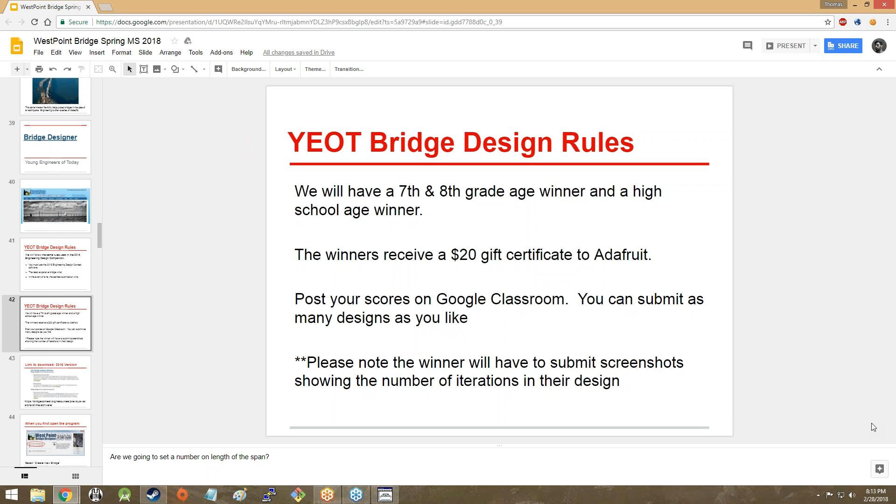So yeah, the winners will receive a $20 gift certificate to Adafruit. Post your scores on Google Classroom. You can submit as many designs as you'd like. Please note that the winner will have to submit screenshots showing the number of iterations in their design. It's basically how you arrived at the bridge that you won with eventually. In the event of a tie, the earliest submission wins.

Alrighty. I've got a couple people who need to download it, so I'll give everybody a couple of minutes to download and install and stuff like that. So at 8:17, we will pick things back up and go from there.

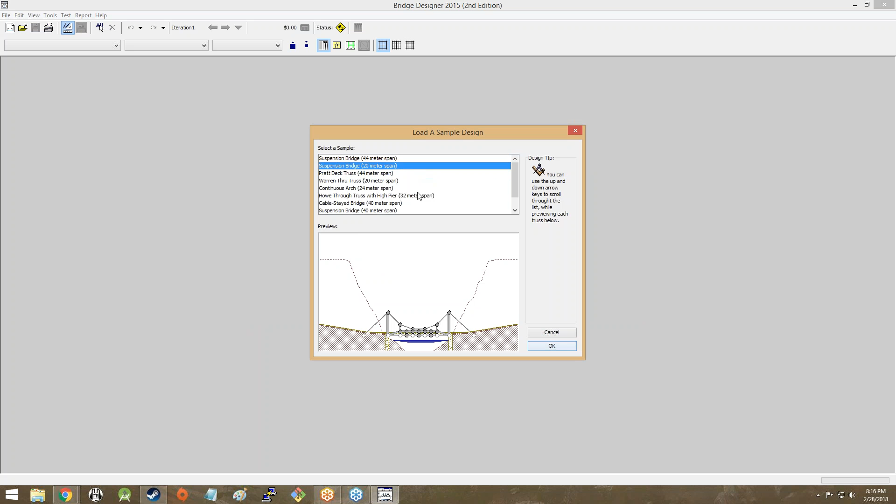Okie dokie. So let's go ahead and get started. So once you've gotten it open, you'll be greeted with this wonderful window. You can either create a new bridge design, which will create a bridge from more or less scratch, kind of, sort of. You can load a sample bridge design, which will allow you to look at some other bridge designs that exist, so that you can get ideas. And you can also open an existing bridge design if you're already working on something.

Since we're going to be working anew, you're going to be setting up a new bridge, and there's a wizard that starts everything off.

Not a literal wizard. I always got really excited about this stuff when I was younger, and there was an install wizard, and I thought it was the coolest thing in the world, and then I realized what an install wizard actually was, and I was a sad child, but that's okay. So yes, not a literal wizard.

So it's basically just a number of steps to walk through in order to get this bridge started. One of them is reading the design requirements, which seems silly as a first step, but it's actually a good idea, because you always want to make sure you know what exactly you're designing for. So this bridge has to be able to carry its own weight, to include the weight of the reinforced concrete deck, plus the weight of a standard truck loading, and to keep the project as low cost as possible.

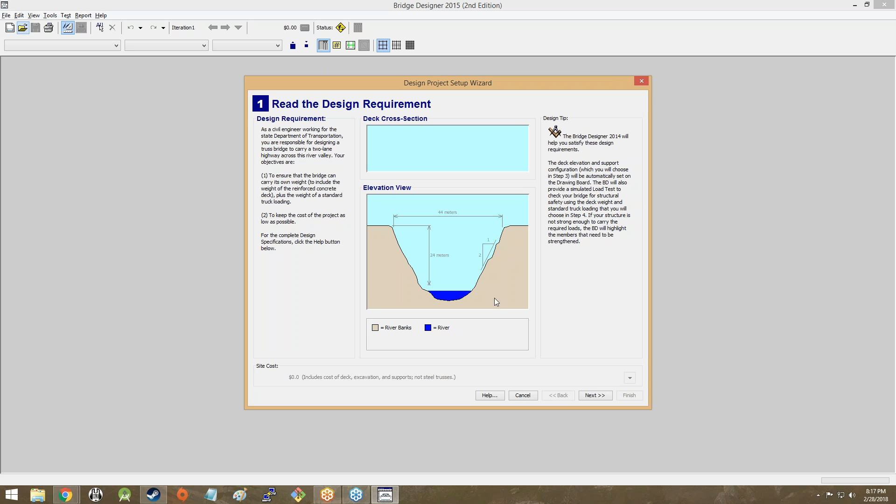If you click the Help button, you can get more complete design specifications, but we're going to click Next. Oh dear. Or we're not going to click Next.

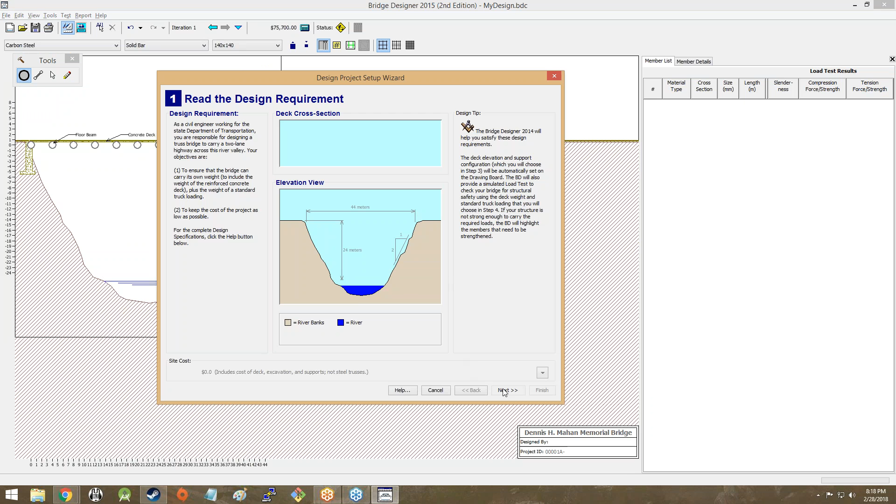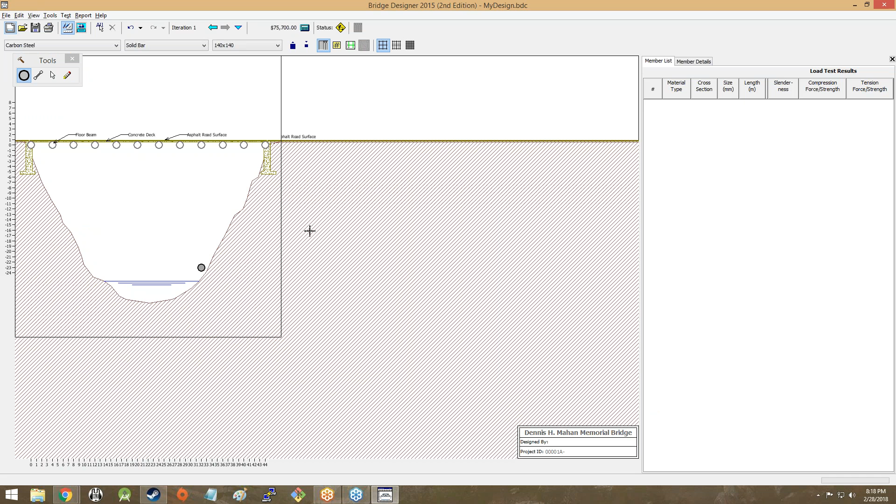Okay, I don't know what I just made. All right, I just made that. No. So my computer has this really irritating issue where the screen doesn't update for this. So it's a lot harder for me to show you guys what's going on when I can't see what's going on. As you can see, once I made the window smaller and then reopened it again, all of those nodes that I clicked to create now show up. So that's not ideal.

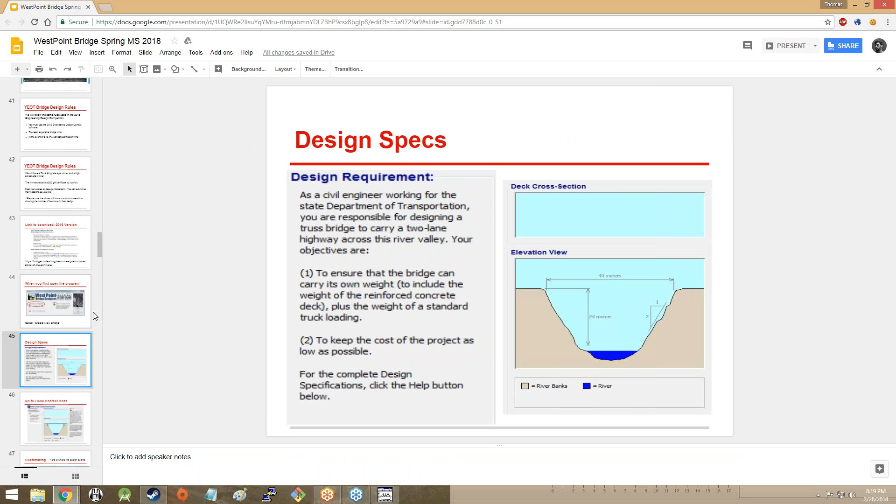Maybe I'll just have to go through on the slideshow. Unfortunately, it's always a little bit nicer when you can do it more interactively than that, but that's okay. So you read the design requirement.

If you're entering a local contest, you enter the local contest information. You guys are not entering a local contest. Anything that you create is going to be submitted to that Google Classroom, so there's no local contest code or anything like that to work with.

Then you want to select the deck elevation and the support configuration. The deck elevation — as you lower the deck, let's go to a picture here. So as you lower the deck, what you're actually doing is lowering the bridge as well, and that makes the span smaller because the bridge doesn't have to cross as far.

Because as you all well know, since you're good at looking at things with your eyeballs, this up here is a further distance than this down here, which is a further distance than this down here, and so on. So by lowering the bridge, you actually make it a shorter bridge.

However, that does increase the cost of the bridge pretty significantly, because they actually have to excavate the riverbanks away in order to lower the bridge down to that height so you can have a shorter bridge. So it's a trade-off: do you go with the lower bridge that's more expensive because you can eventually make it cheaper by using fewer materials?

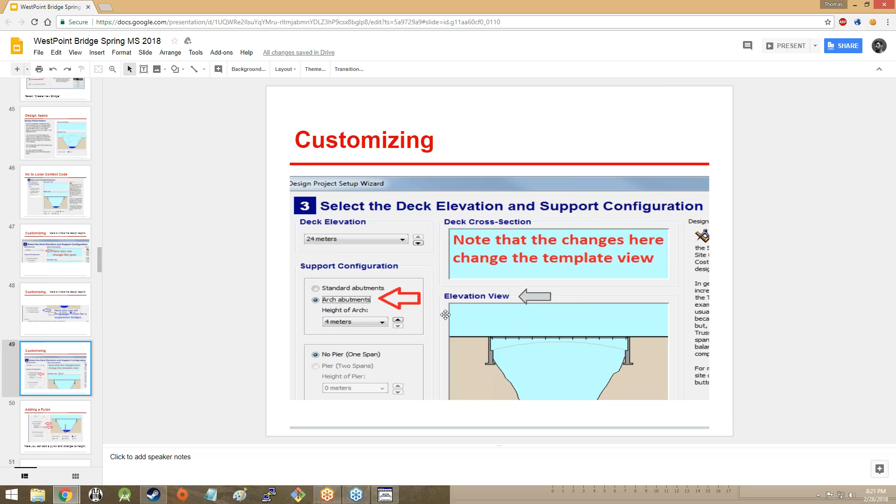Then you can add a pier if you'd like, which is going to be this pillar in the middle. And the pillar will allow you to generate additional support for the bridge because you can bring the pier up and then build trusses underneath it.

Then you've got cable anchorages. And if you wanted to anchor cables and make like a suspension bridge, you could add some cable anchorages.

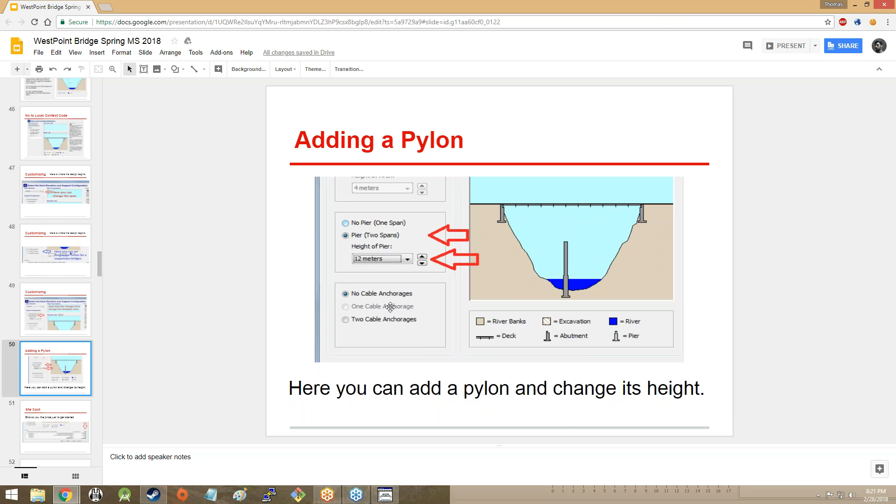Then you'll notice that all of those things change the cost of the bridge. And this is an initial cost for the bridge — all of those things are going to change the cost of the bridge.

You can click the little arrow in order to get a cost breakdown so you can see how much everything costs, so maybe it's a better decision to make the span longer because it costs so much to excavate, or maybe it's a better idea — like you've saved some money here, so you can try to include a cable anchorage so you can have a little bit of extra stability and hopefully make it cheaper, stuff like that.

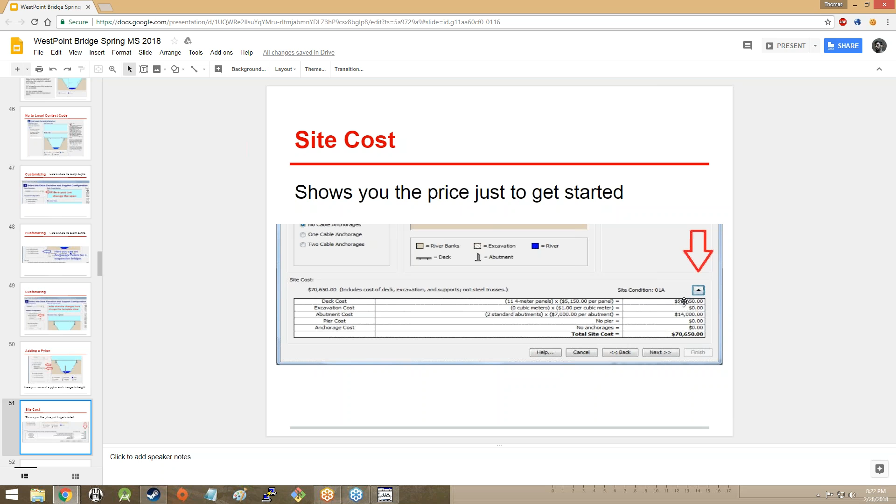Once that's done, you can click next, and then next is going to be the deck. You can either use regular medium strength concrete or reinforced high strength concrete. Reinforced high strength concrete is more expensive, but it's also thinner, harder and stronger, so you might be able to save yourself a little money because your entire bridge will be a little bit lighter. Ultimately it's a judgment call.

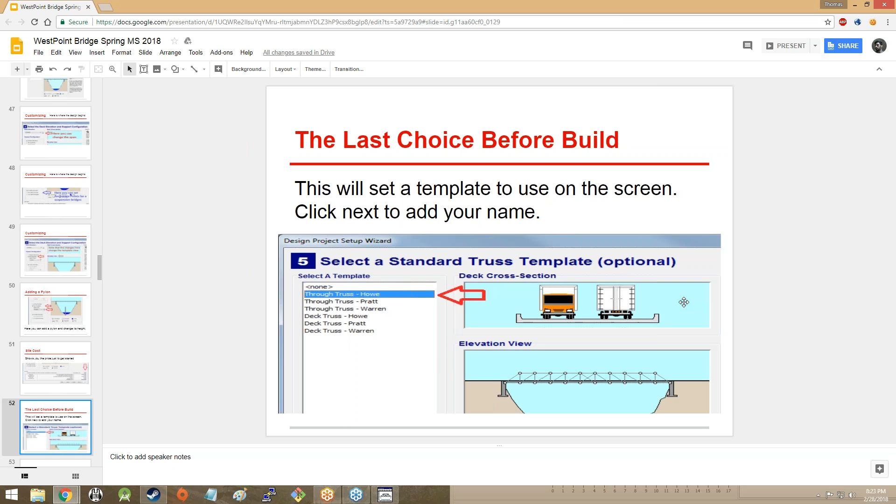Then you'll select a starting truss template, which will allow you to basically create a little template that you can work with in order to get started on making a bridge. Then you give it a name, you hit finish, and you're off to the races.

You get a few different tools on the screen, which are pretty useful. Let's see here.

So you've got a little window here that I'm sort of dragging around and making flip out. This is your tools window. You can draw new nodes, joints, bars or members. You can select items with the cursor, and you can erase them with the pencil eraser.

So I can go through here, and I won't be able to erase these because the screen is updated since then. That's not actually where the nodes are anymore, but that's okay.

Nodes can be drawn on the gray squares provided in the truss template. Now you might notice that along the bottom of the truss template, where the ground of the bridge is going to be, you won't be able to draw anything there, and that's okay. That's because they've already started for you, so you have a starting point for your bridge.

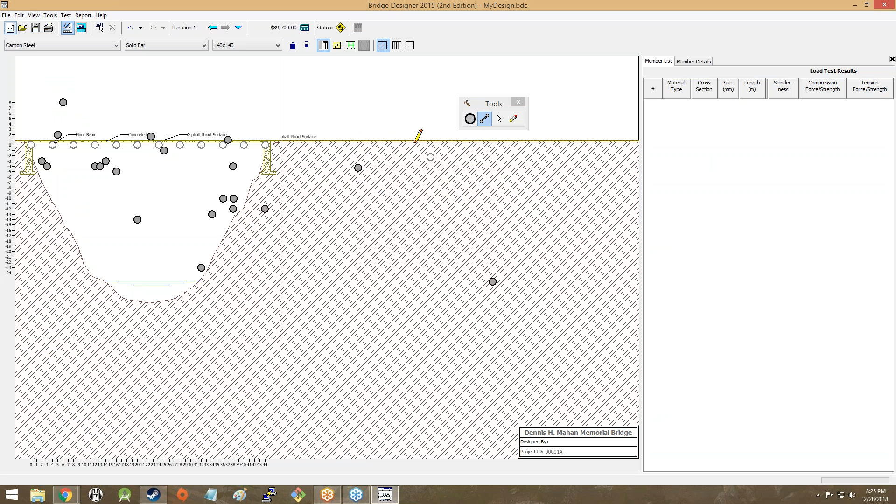Everything else you can just draw, the nodes that go above or below it according to the template you picked, and then you can use the second tool, the member tool, in order to draw between nodes. I see, I found some of them. Draw between nodes so that you actually can get started on the structure of your bridge.

And as you draw this stuff, you will see the member list over here on the right-hand side update with various information. And this is actually very useful information: the material type, cross-section, size, and length.

Material type, cross-section, and size we're going to go over in a little bit, because those are variables you can change on the bars in order to make them stronger or weaker, or cheaper. Then you've got length, which is pretty self-explanatory — it's just how long a particular bar is.

And then you've got slenderness, and the slenderness is the ratio of the length to the size. So a higher slenderness means that you have a thinner and longer bar, which means it is going to be probably more unstable — in fact, definitely more unstable than a shorter bar would be. It would necessarily be a weaker bar, just by how physics works.

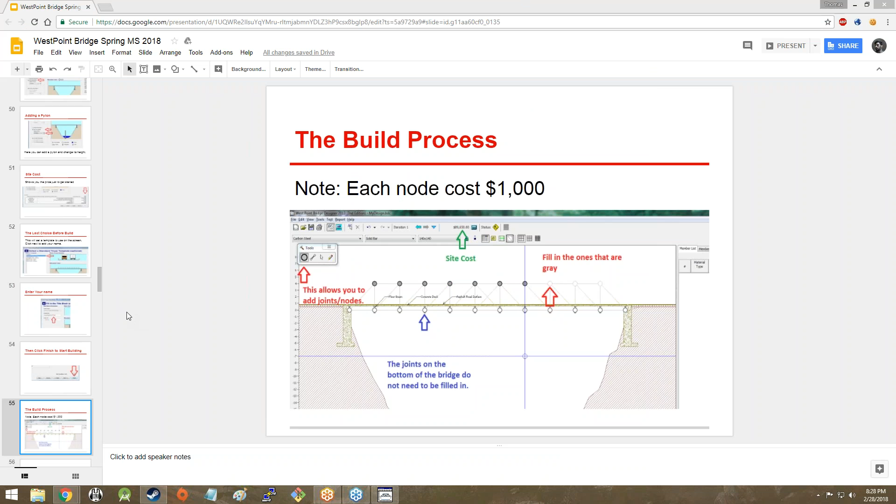So with that in mind, why don't you go ahead and finish drawing the bridge. Basically just fill in all the little nodes on your template with the node tool, and then once all the nodes are created, go ahead and use the member tool to draw between the nodes and basically trace along the light gray lines of the template.

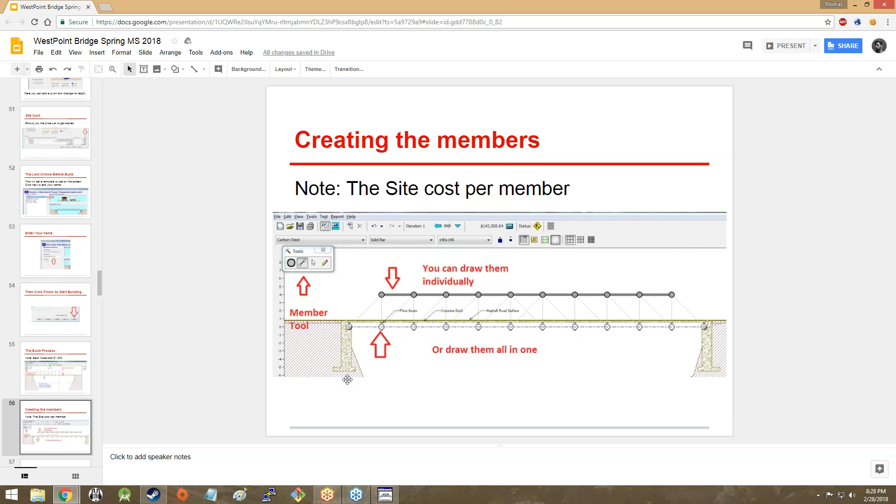Again, this is one of those things I really wish I could show you, but it's just really not cooperating with me, so I won't be able to.

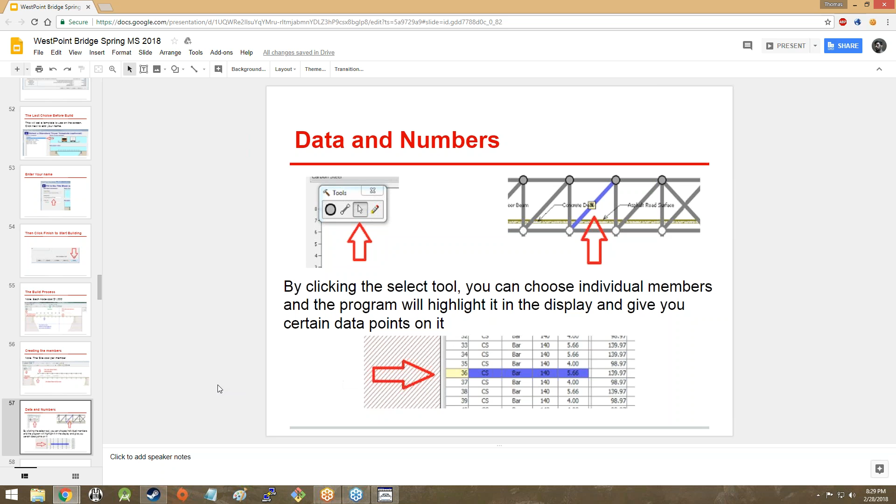As you create new joints and members and all that good stuff, you will get items that appear on the member list on the right-hand side. You can select members and joints by clicking on them, or you can select members by clicking on the member list over here on the right-hand side. So there are two separate ways to do it. Sometimes it's a little bit easier to select them from the member list, for reasons you'll see in a minute.

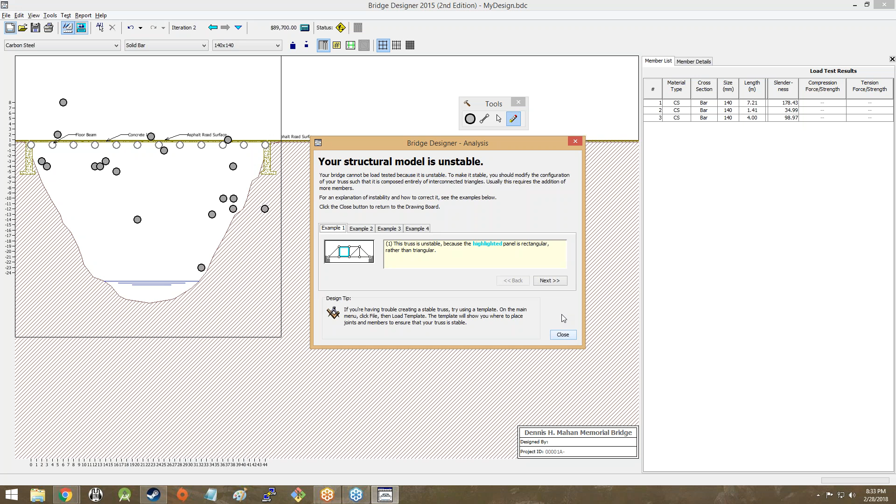Oh no, you're fine. No rush at all. I just wanted to make sure everybody was on the same page. I wasn't — there was more or less just a time limit anyway. It wasn't like I was waiting for hands or anything.

But you will see a nice little 3D representation of your bridge, and then it'll settle, and then a truck will try and drive across it. Now, that second part might not happen if, in the process of settling, any of the members on the bridge get damaged in any significant way.

So if that happens, or if the truck tries to drive across and it fails, that's okay. Go ahead and click the design button again, which is right next to the simulation button, and it's going to have the little square and the ruler and everything like that.

You'll see under your member list, you're going to have all of your listed members, but some of them are going to have red and some are going to have blue. Or you might just have only red, or only blue, but whatever. Chances are you're going to have some colors, because it's not often that people pass on their first try with the stock bridge.

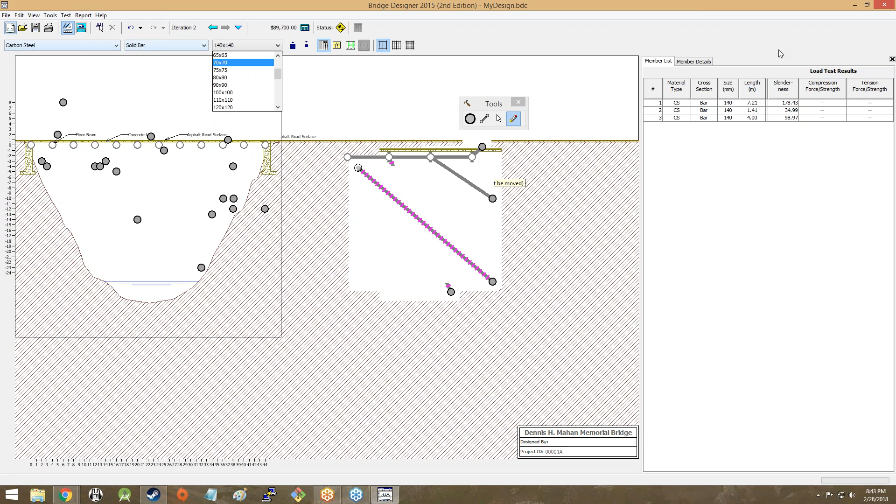Increasing the quality of the steel used is also a very good way to increase the strength, but keep in mind that the cost of the steel does increase pretty significantly pretty quickly. So as you can see, carbon steel is 2,646. But if we change it to quenched and tempered steel, it's up to 3,692. So obviously, it's your call to see whether or not the increased cost is worth it,

because that cost is for that entire member. So obviously the price difference is going to vary by length and by thickness of the bar, but sometimes it can be really worth it to have a smaller reinforcement member that takes a lot of strength and turn it into a really high quality steel, because the cost change is going to be minimal. But then sometimes, if you've got a really long bar across the bulk of the bridge, you may need just to bite the bullet and turn it into a higher quality steel, even if it's going to be significantly more expensive, just so your bridge stays standing.

Anyway, that's the whole idea behind this bridge building software, and we can go more into the math on it and things like that on Monday.